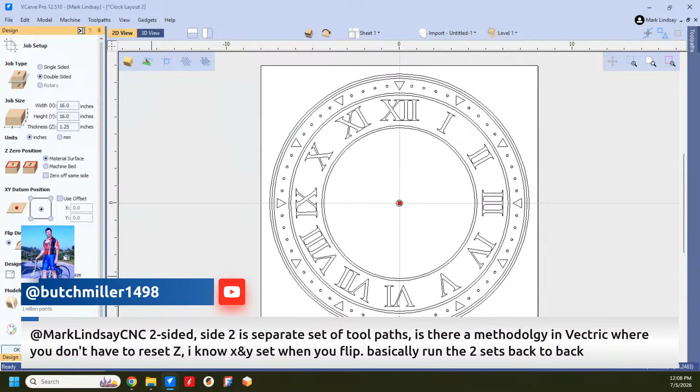From here, we have a couple of things we have to consider. One is how to index this thing after we've flipped it. The other is, when are we going to do our cutout? And how do we make sure we get everything correct? Well, for the indexing, for the positioning, there are many ways of going about it.

Some folks will go to great length to make sure that their material is perfectly square, and they'll use a fixture, even something as simple as a fence, a right angle fence, kind of like a square. And they'll put the bottom left corner up against that. That way they know they can index it. If they do it that way, they have to make sure, A, that your top and bottom vectors are perfectly in the center of that material. Then they have to make sure that this piece is perfectly square.

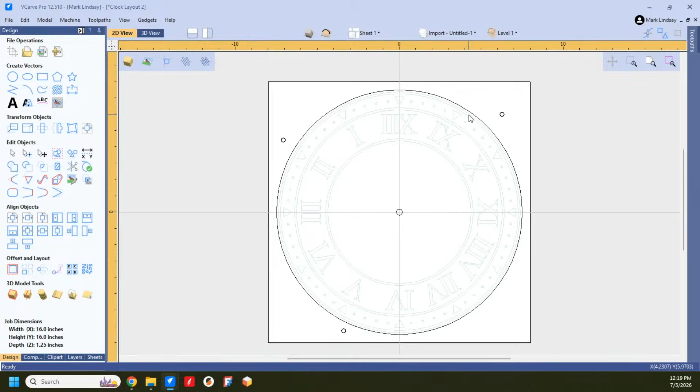So back over to the top. Now I've got my design finished. This is what I'm going to do, with the exception of the back. So my front face is finished. Everything is cool. Now I'm going to go over and I'm going to toolpath it. So there was already a toolpath made for this because it was a single-sided job when I first got into this. Well, now it's a two-sided job. So I've got to change it a little bit.

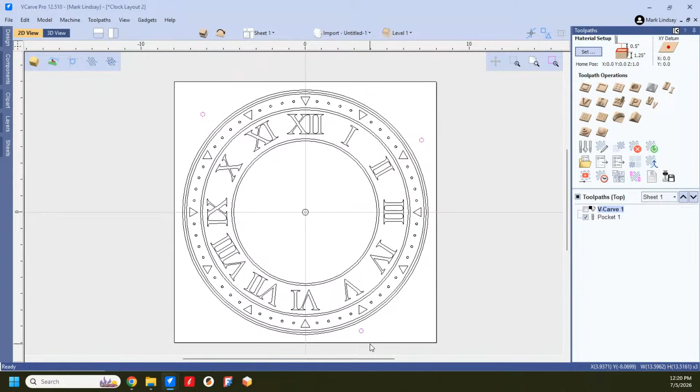The first thing I need to do is I need to select my index holes, and I'm going to use a drilling toolpath. Now I'm using a 1/4 inch bit, and I'm going to drill straight down. So it's got to be an upcut bit. I don't care if I get chip out here, because that's going to go away. So I'll use the drilling toolpath with an upcut 1/4 inch end mill. Now I'm going to make my cut depth for drilling. I'm going to make it 5/8 of an inch deep, 625.

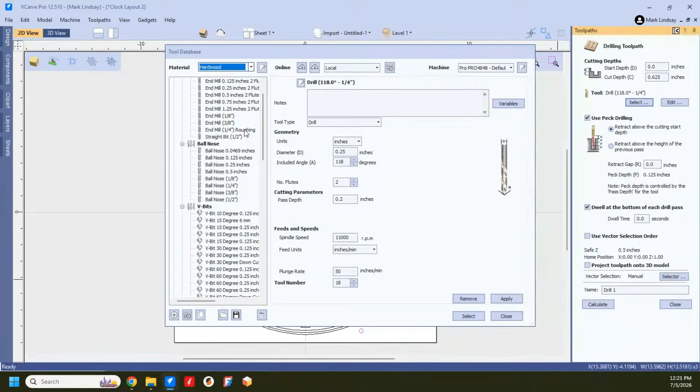Okay. And I don't have a solid carbide 1/4 inch drill. I'm going to use a 1/4 inch upcut end mill. I'll apply that. Select it. And I'm not going to use peck drilling. It can go 5/8 of an inch without peck drilling. I do not want to dwell at the bottom of the drill pass.

And we'll call that drill 1. That's fine. No, it's not. I need to differentiate this. This is dowel holes in material. And we'll calculate. All right. I don't know if I need to preview this. It's a dowel hole. Uncheck the pocket. I don't need that. But that needs to be the first thing I do. So now I'm going to bump that up to the top of the list, just by using this. Select it and then use these arrows over here.

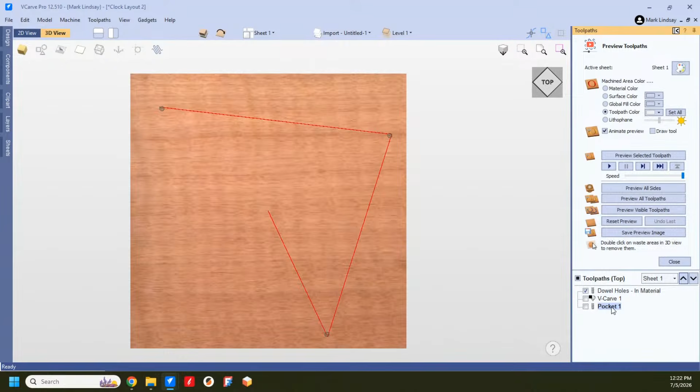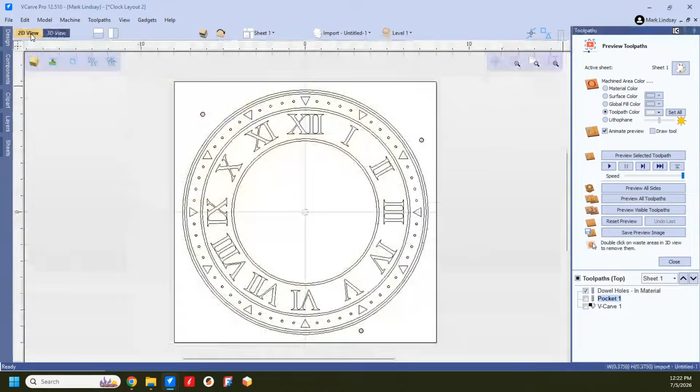Then I can come along, and because I'm using the same bit, I can do the pocket, which is for the shaft hole. And let's see, V-carve, that's going to be just fine. Now I'm going to go back to the 2D view. I'm going to select this one. I'm going to close my preview. And I'm going to do a profile toolpath.

And my cut depth, I'm going to cut 1/4 inch, 0.25. I'm going to use a downcut 1/4 inch end mill, 0.25 inch. Select. And I'm going to cut to the outside of that vector. I don't need to do a separate last pass. Yeah, I probably should. I'm going to go ahead and do a separate last pass with an allowance of 0.01.

What a separate last pass does is, I'm doing 2 passes. The first pass will cut 0.01 outside of that vector. Then the next pass is going to cut right on the vector. What this will do is it'll eliminate those plunge dwell marks along the edge, especially when I add ramps. And we're going to do a distance of 1 inch.

And we're going to do a smooth ramp, a distance of 1 inch, meaning it's going to slowly ramp in and cut 0.01 away to the outside of this vector. Then on the second pass around, it's going to ramp down and cut right on the vector. That eliminates the little witness marks, the little layer lines you get from each pass, because that's going to cut full depth in one pass. Okay, but it's only taking 0.01 of material off.

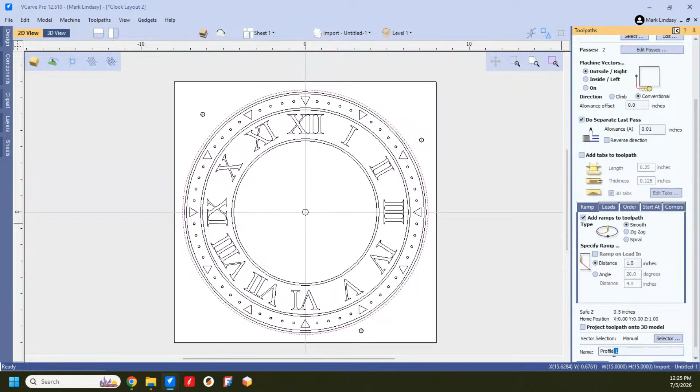Okay, and we'll call that just profile, is good. We'll calculate. And now I'm going to go ahead and preview all of the toolpaths on the top side. The index holes, the V-carving, the pocket, and then that little bit of a cutout right there. Not a complete cutout all the way through the material. Okay, so I'm going to leave that like that. I think we're looking good so far.

Now we'll close it. I'm going to come back over to the Design tab, jump into the 2D view. Now we're going to go to the bottom. I can tell you with certainty that when you go to make a clock, the best decision you can make about the design is you wait until you have that clock movement in your hands before you design the recess for the movement. Because you don't really know how deep you're going to have to make that pocket for the movement until you have that clock movement in hand.

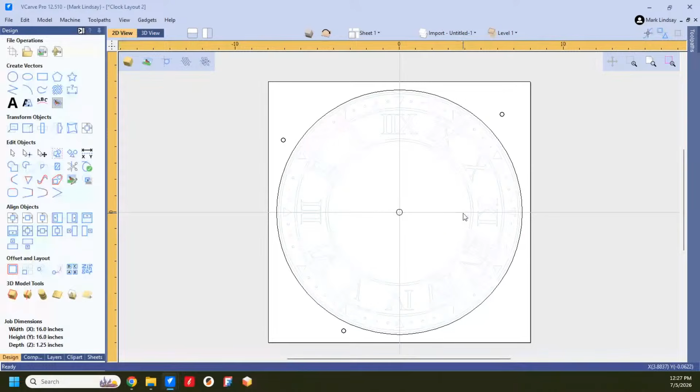But I find that when I'm either selling or giving a gift that has my name on it, I don't want it to be a piece of junk. So I'm willing to invest a little bit more money in a quality movement that isn't going to suddenly start making the minute hand spin like a fan or something like that, or just simply stop working.

Clock movements come in all kinds of shapes and descriptions, but Seiko is a good quality name, so I'm going to go with the quality Seiko movement. That's just my 2 cents. It has my name on it. I want it to reflect quality. I don't want to give somebody or sell somebody a piece of junk.

So, the movement I have, let's go ahead and figure this out. The movement I have is 3 inches tall and 3.5 inches wide. So I'm going to come up here to my draw rectangle. And I want this to be drawn on my 0 point, my X0, Y0, because again, I've got my XY datum position at the center.

Now, I prefer to radius the corners. I'm not going to get an exact radius off of this clock movement, but I can get close. I'm just going to radius those corners to 0.25, and that'll give me a decent radius on the corners of this rectangle without it being overdone. The movement will fit, so I'm not really concerned about it.

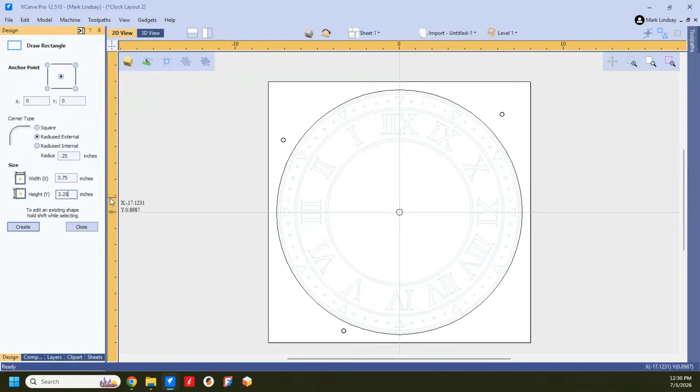So for its width, I'm going to go with 3.75. And the height is 3 inches. I'm going to do the same thing. I'm going to go with 3.25. So it's a little bit bigger than the movement. That gives me some leeway. And I want it on my XY0, create, and there it is. So that's where my clock movement is going to go.

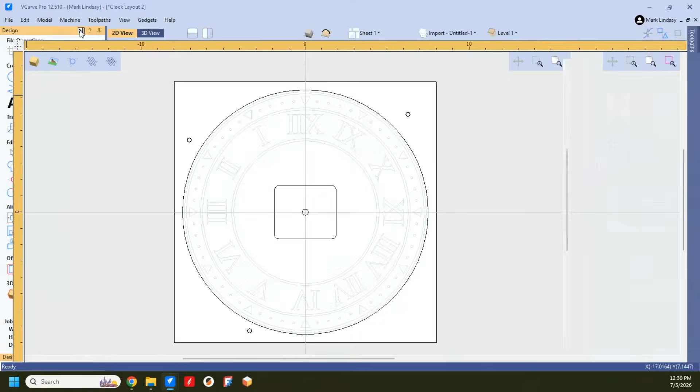Now I got to figure out the depth, because this is going to be the second thing cut on this side. We'll go over here and we're going to start tool pathing. I don't have any tool paths for the bottom yet. So the first thing I'm going to do is drill these index holes, because without these index holes, the whole project could be just shot. And I'm going to do a drilling tool path again. And it remembers everything that I put in when I worked on the other side.

I'm using a cut depth of 5/8 of an inch. And here's why. I use 1 inch long pieces of hardwood dowel. Now, a lot of folks will say, wait a minute, why don't you use a precision ground steel dowel? Number one, I don't want to run into it with a bit. But these hardwood dowels are very rarely a 1/4 inch diameter. Yes, they're anywhere from 0.23 to 0.24. Well, that's a lot of slop. With one, yes. With three, no.

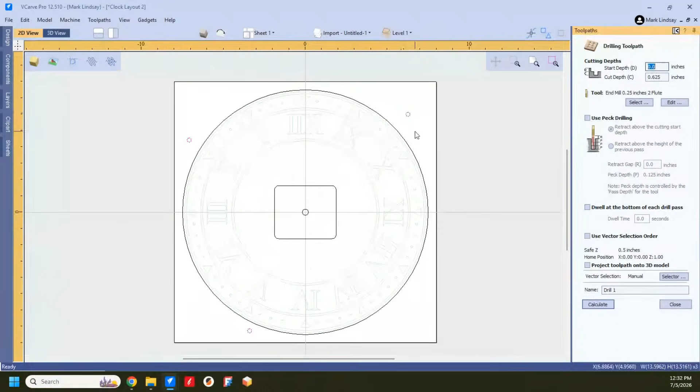I've never, not once, had a two-sided project fail because of using the hardwood dowels. Not once. One dowel, yes, you're introducing some wiggle room there. Two dowels, it's less. With three dowels, it's almost non-existent. In fact, it pretty much is non-existent. Again, I've never had one fail. I've never had one come out misaligned.

So I use the cheap wooden dowel that I can get for 50 cents down at Lowe's or Home Depot and get a bunch of 1 inch long dowels. So I'm using 1 inch long dowels and I'm drilling 5/8 inch on each side. That gives me a little bit of wiggle room there as well. It's not going to stand up too tall, and it's not going to disappear down into the hole.

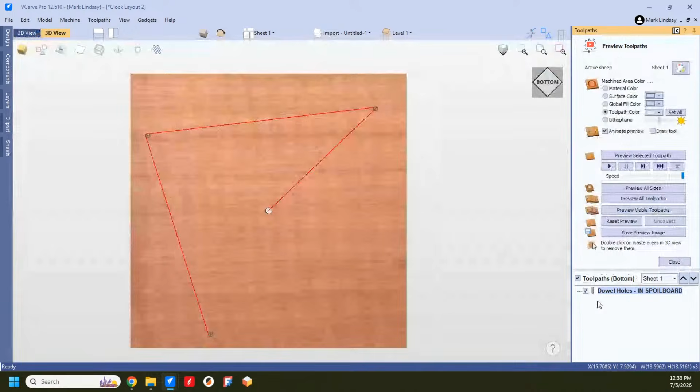Again, I'm not going to change anything except the title. And this is dowel holes in spoil board. I need that because I will not remember, because I may calculate this and then not cut it for another 2 months while I'm finding the right material to cut it out of. So we'll calculate that. That's our first tool path for the bottom side.

All right, now next, let's go into 2D view. I'm going to cut this pocket. Now, this particular movement is just slightly under 3/4 of an inch thick. And the shaft for the hands that's got to go through this hole is 3/4 of an inch long. So I've got 3/4 and 3/4, that's 1.5 inches. My material is only 1.25 inches deep. So I can't bury this movement in the back of my material.

Well, how the heck am I going to hang it? Well, that's simple. The Seiko movement I have has a hanger built into the back. It has a keyhole in the back of the movement itself. Some of them have a little tab, and that's going to determine how deep you can bury it in. If the tab sticks up over the movement itself, that's also going to dictate how deep you can put that movement. So with all that said, for the depth of this movement, I need to think about that shaft length.

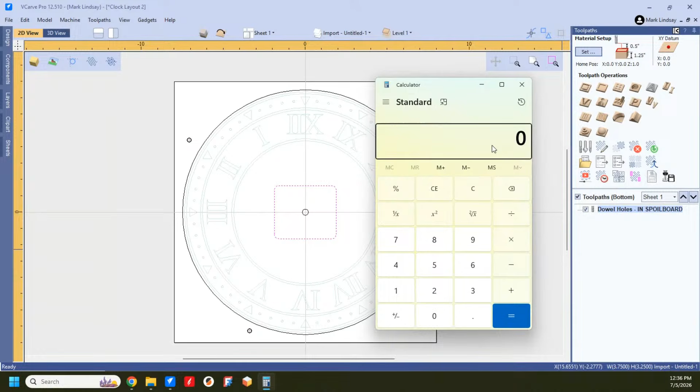they said there'd be no math. Well, let me bring up the calculator here, and I'll do it for you. Right here live, admitting I should have never written in that book that math sucks.

1.25 minus 0.5 equals 3/4 of an inch. So that's how deep I'm going to make this pocket. 3/4 of an inch. So I'm going to cut this pocket 0.75, and I'm going to use a 1/4 inch end mill. It's going to make 6 passes. That's fine. I'm going to use an offset, mainly because nobody is ever going to see this. I don't care if it leaves circular marks down on the bottom of this pocket. I'm going to ramp in the plunge moves over a distance of an inch, which is fine for that 1/4 inch bit. And I'm just going to call this pocket, and we'll calculate.

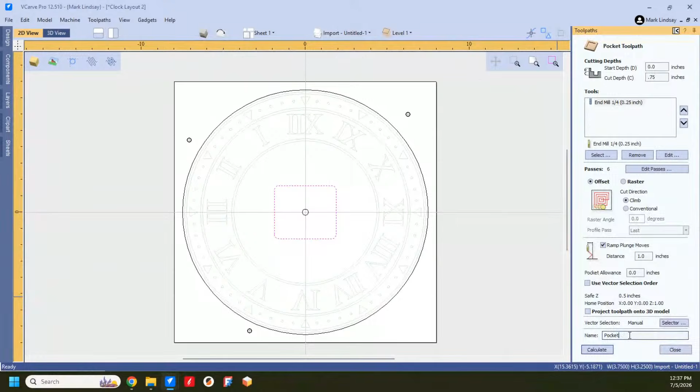Okay, we've got those two. Now, turn on my vectors. Now is when I need to do my profile cutout. Oh, I'm in the preview. Close. There we go. Now it'll let me select the vector. And again, using a down cut end mill, I'm going to go the whole depth. So we're going to go 1.25. Going to take 10 passes. That's fine. I am going to do a separate last pass at 0.01. Oops. Come on, Mark.

0.01. Not going to add any tabs to the tool path, but let's say I wanted to add them. Now, got to remember, I've already cut a 1/4 inch into the front. So if I add tabs now and they're less than a 1/4 of an inch tall, I've got some problems. So a 1/4 inch long is fine. I'm going to make them a 1/2 inch thick. 0.5. And the reason for that is if I machine away a 1/4 of an inch here, when it comes to these tabs, I'll still have a 1/4 inch of tab left. Okay.

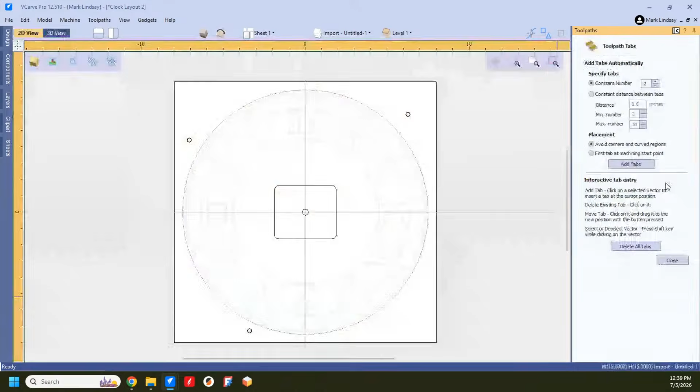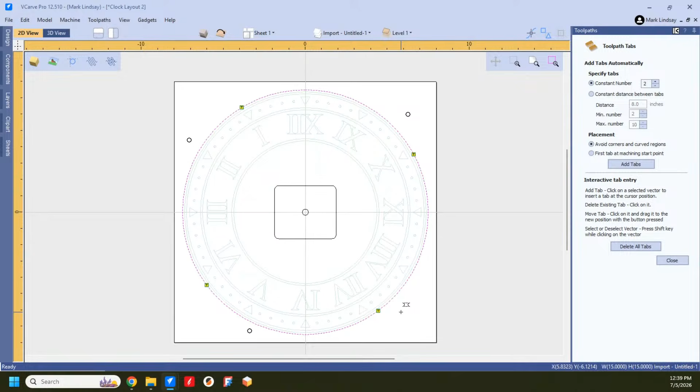Where should we put one? I'll put one right here. And I'll put one over here. Another here and another up here. They're kind of asymmetrical, but I'm worried more about how I'm going to mount this material. If I've got screw holes out here, I don't want the tabs interfering with them. Okay. So I can close that, and now I can calculate the tool path.

And I'll preview all the tool paths on this side. There's my index holes, which will actually be cut in the spoil board. There's the pocket for my movement. Yep, the tabs got cut through. I got to make those tabs thicker.

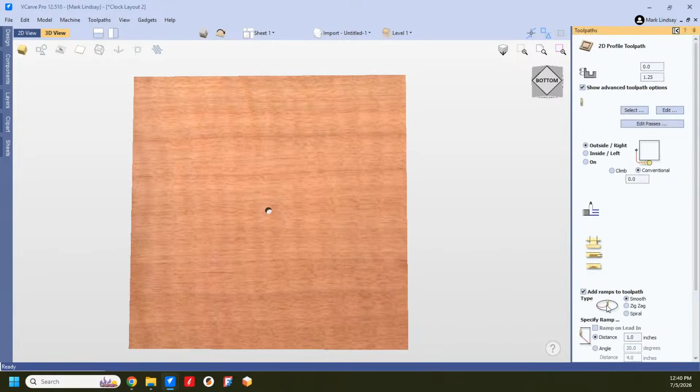Okay. So we're going to undo last. And I'm going to take that cutout, and I'm going to make the thickness of those tabs, we'll go for 3/4 of an inch. All right. Now we'll calculate it. Now we'll preview. Okay, now I see the tabs. There we go. Now we'll preview all toolpaths. In fact, I'm going to preview all sides. There we go.

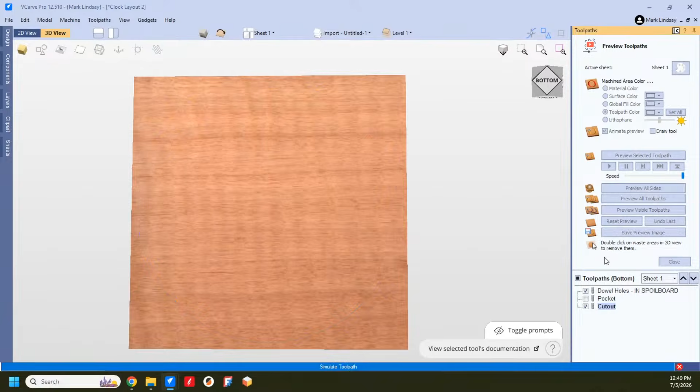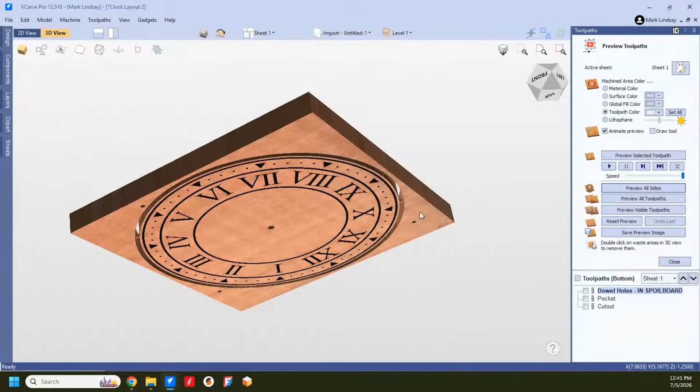Starting with bottom. And there is my tabs. That's already done, so that's not a big deal. Tabs are still not good enough. Oh, they're 3D tabs. There's your problem. How thick did I go here? Oh, we went 1/4 of an inch deep. Oh, I'm -1 inch. How did that end up being 1 inch? No, I'm at -1. Okay.

Yeah, all right. We're going to undo last again. Oops. Didn't mean to do that. There we go. I'm going to undo last. Okay, wait a minute. We'll reset preview. Cut out. Looks like I'm making them 1 inch thick. Oh, I'll leave it alone. Turn off 3D tabs. There we go. Come on, Mark. There's a little bit of back and forth in all of this. Now we'll preview all sides. And it's going to do the back first, of course.

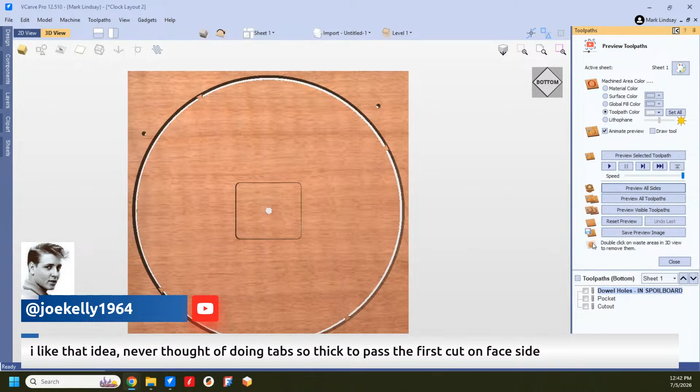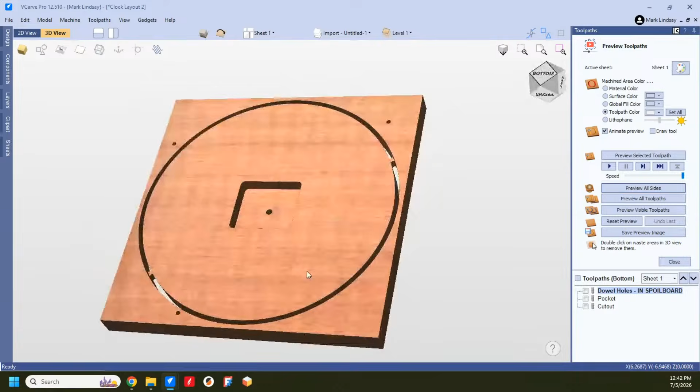Joe Kelly says, I like that idea. Never thought of doing tabs so thick to pass the first cut on the face side. Yeah. And nice feature would be if you could set tab location in the middle of the material on a two-sided project. Yeah, if you're gonna use that method of cutting a little bit of a profile on both sides. But now you can see with the standard tabs, they held. They're not 3D tabs. I can get into the advantage of 3D tabs versus standard tabs another day. There we go.

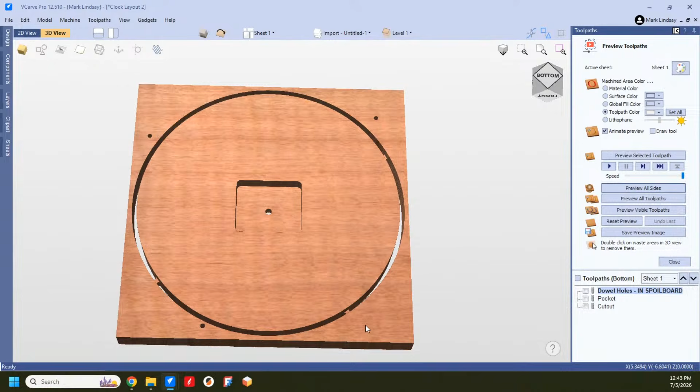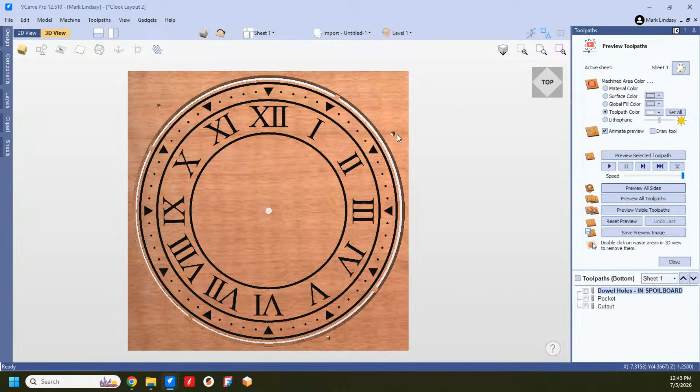So I've got my pocket cut out. I've got my profile cut out. And both sides looking good, ready to go. The crucial part, and this is the part that people find hardest to wrap their heads around, is these indexing holes. While it looks like they should not line up because we're on opposite sides here, they will line up. They do line up. Make them asymmetrical so they'll only line up and index one way.

There are a couple of things to pay attention to when you do a two-sided project, especially if you've never done one before. I would encourage you to get some scrap wood and just practice. Come up with something. Cut a rectangle out and then cut a pocket out of the back. Or vice versa. Cut a pocket in the front, flip it over, and cut the thing out.

For scrap wood, I found my best source is I get on Craigslist and go to the free section. Yes, I'm one of like 11 people that still uses Craigslist and not Facebook Marketplace. This is especially true late Sunday and on Mondays. You would be amazed at the wood that people are getting rid of. Garage sale leftovers, or somebody had a section of fence blow down, extra construction materials. It doesn't matter.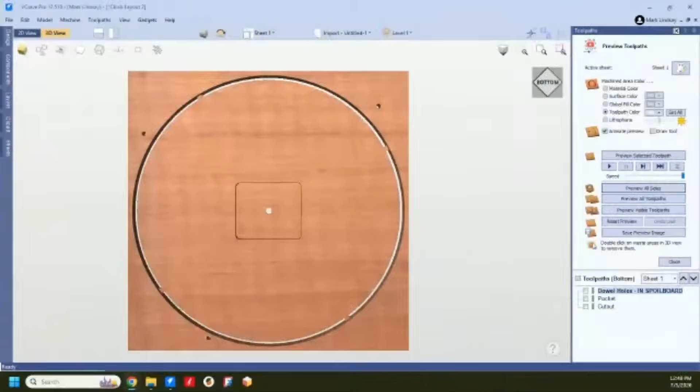Let's go back into the software here. I've got a new session open here. Anybody can get into their clip art and make themselves a dish. We've got a little bowl shape here. Whoops, I messed that up. I forgot to hold down shift, but that's all right. Center it back in the center of my material. Select it. I'll go into the component tree. I'm going to change combine mode to subtract. That way, when I look in the 3D view, I've got a dish.

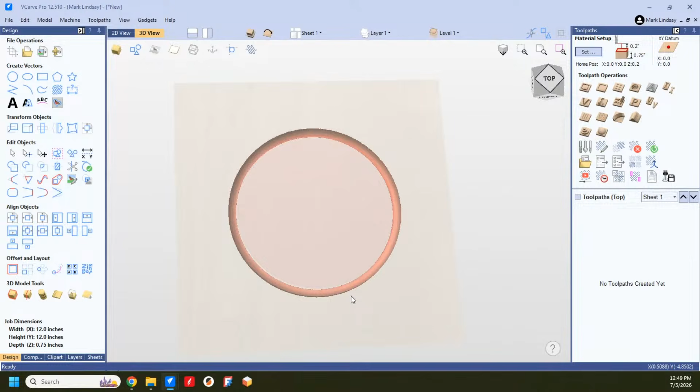All right. I'm going to put a zero plane over the top of that to fill in the jagged edges of that dish. And that's going to, what in the world? It's cutting through the material. Oh, well, 0.75, 12 by 12. Okay, that's fine. And this is a double-sided job. Click OK. And I'm going to go back over to my component tree and look at my flat round circle. I'm going to go to the properties. And I see it's 0.3449 shape height. I'm going to go a little bit further than that. I'm just going to go 0.5. Let's play it safe for this demonstration. All right. We'll close that.

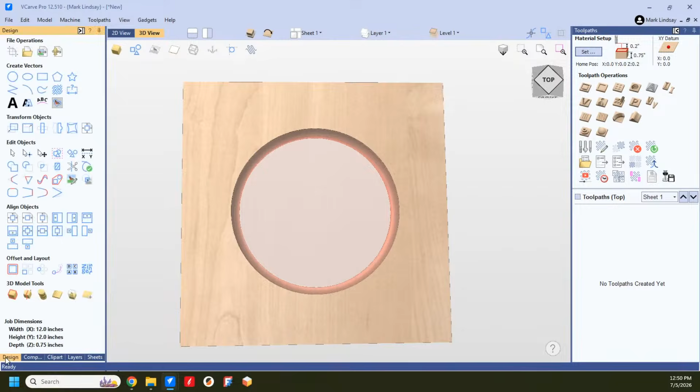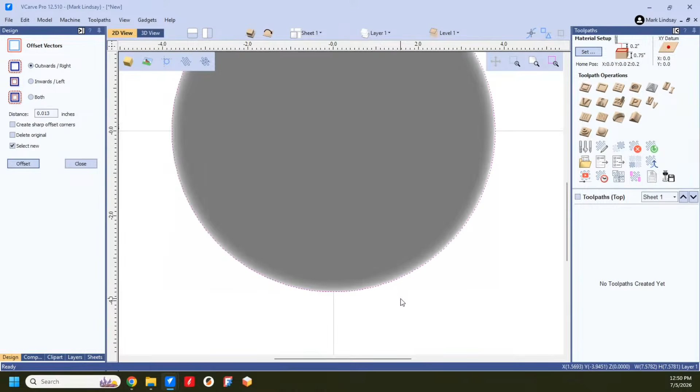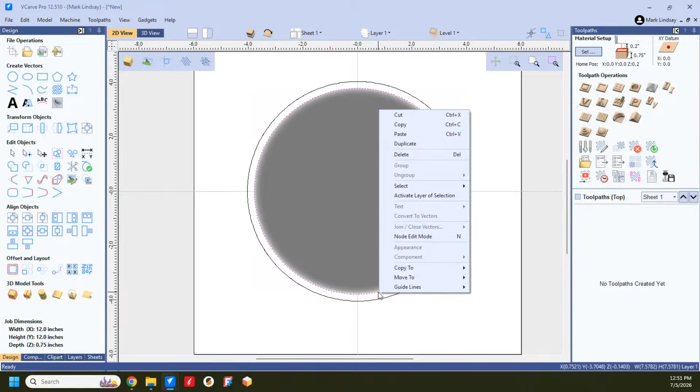And we'll go back into the design tab, back into the 2D view. Got my component selected. I'm going to draw a vector around that component. Then I want to offset it. How thick do I want the rim? No, come on. Let me select the vector. There we go. How thick do I want the rim to be? Let's go for a thick rim. No, not so thick. Let's go with a 1/4 inch diameter rim. And I'm going to offset it, and I'm going to select the new one. Now, I'm going to copy this to the other side. This is my profile cutout, remember.

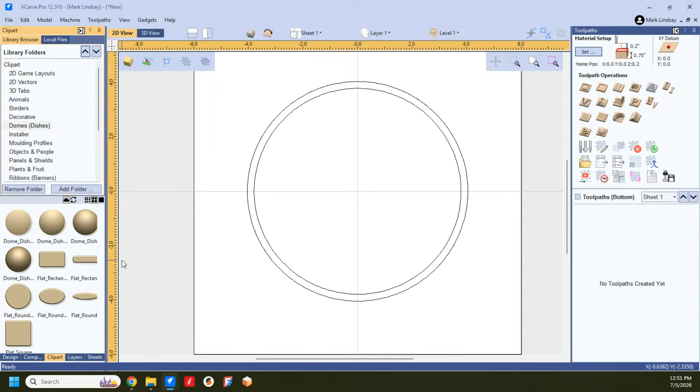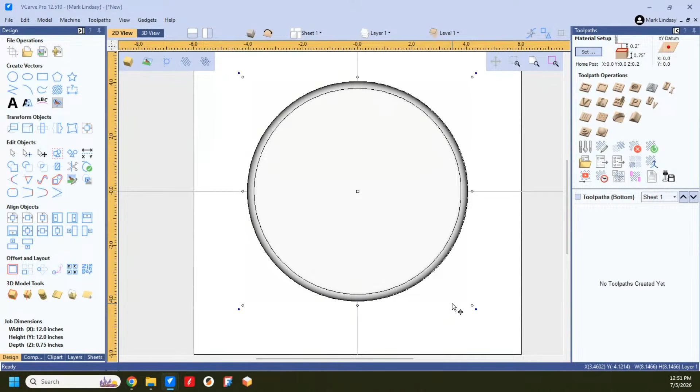Now, I'm going to flip to the other side and go back into clip art. And I'm going to set the same round dish. And we'll hold down Shift, bring it out to where it's the same size as the outside, roughly. Select it and make sure it is centered. All right. Check my 3D view. What have I got going on? Let me look at my component. We got it set to merge.

Let's look for properties. I want my shape height to be, that one's a 1/2 inch. My material's 3/4 inch thick. I want a 1/4 inch thick bottom. Ooh, that's not going to work. Let's go with 625. This is going to be the top, so I want this to be 0.25. Oops, too many decimals. Let's see what we get now. Am I going to have to go thinner? I'm going to have to go thinner than that. That means I'm going to have to make,

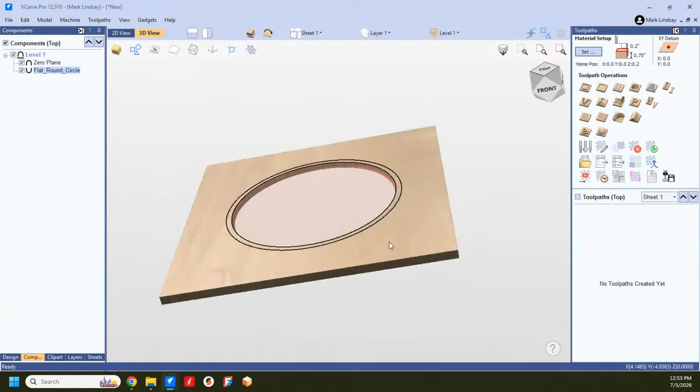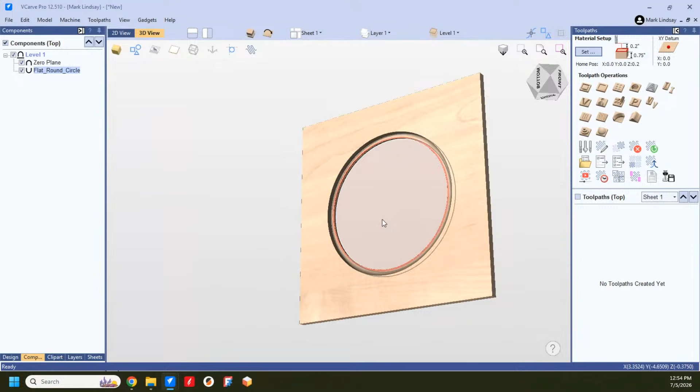all right, let's go back over to the top side. And we're going to take that. Let's go with 375. Still didn't fill it in. It's still cutting all the way through. I don't get that. We're looking at the bottom. No, we're not looking at the bottom. We're looking at the top. There we go. All right, flip it. Now we're looking at the bottom. There we are. Properties.

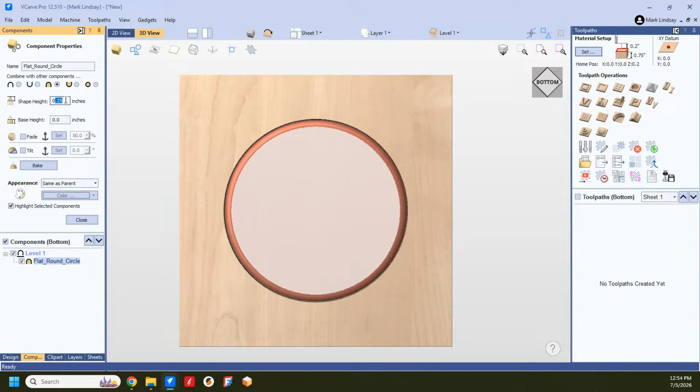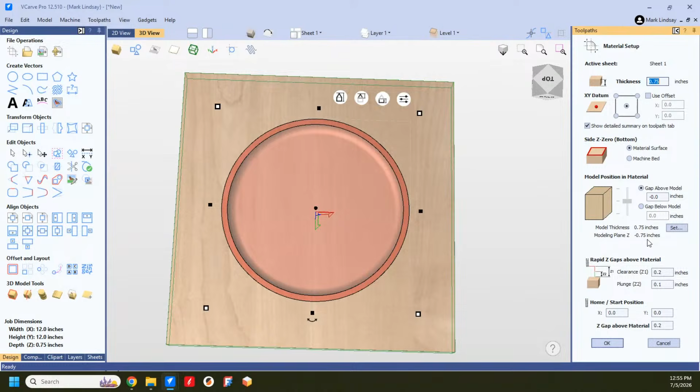I'm playing now. That's why it's silent. And there we go. I was going too shallow, not deep enough. So that's going to be the same thickness. There we are. Now that I finally got it figured out, let me go in here to material setup. Thickness is 3/4 inch, Z zero to the bottom. And we're good. We got a model thickness 0.75, and the model plane Z. Okay, great. So we're all right there.

Now, my point in all of this, as I was trying to say earlier, anybody can come up with a bowl and then do a profile cutout that has the outside straight up and down sides.

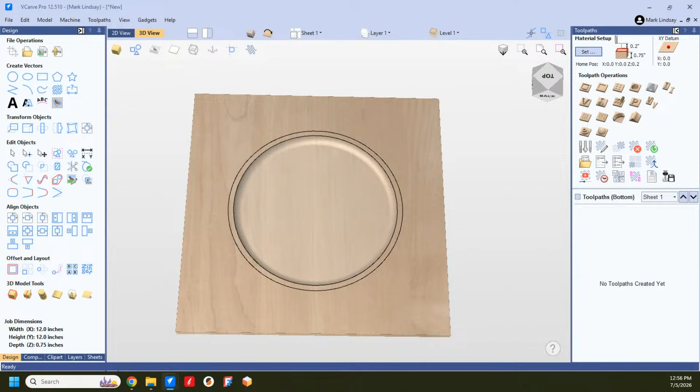Okay? No. I dish on top and dome on the bottom is what I'm doing. Okay? I need to flip it back, so we're looking at the top first. And I'm going to go about this all wrong. There's no index pins, nothing, no indexing dowels.

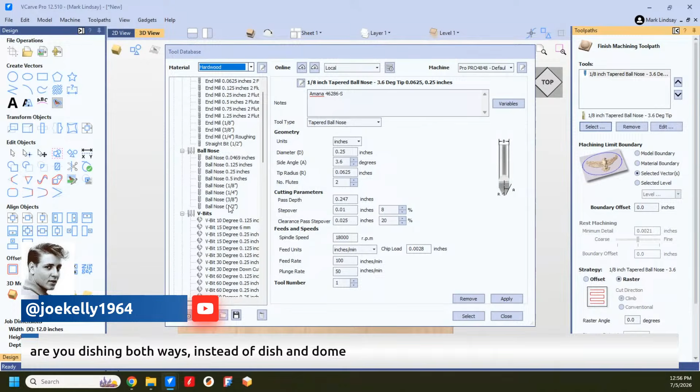And I'm going to go ahead and do a finishing tool path. I don't need an 1/8 inch tapered ball nose for that. I'm going to get aggressive. I'm going to use my 1/2 inch ball nose. There we go. Select. I'm going to use this selected vector here. And I'm hesitant to do offset. I'll go ahead and do raster. Raster angle of 45 degrees. And we'll just calculate that finishing tool path.

I have a couple of questions hiding in reserve, and I will get to them. I have not forgotten about you, Stubbs Mom.

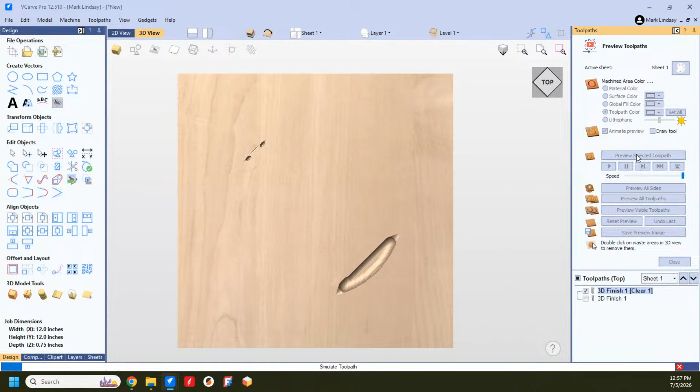And we'll preview that tool path. Oh, I didn't do the clear pass. Hello. Preview that tool path. That's a little bit better. Sheesh. Now, I'm not going to talk about step over. I'm not going to talk about cleaning up. I'm not going to talk about using a bowl bit or anything like that. We're just doing a quick and dirty reveal here to show what a two-sided project can look like and how you can make yours stand out

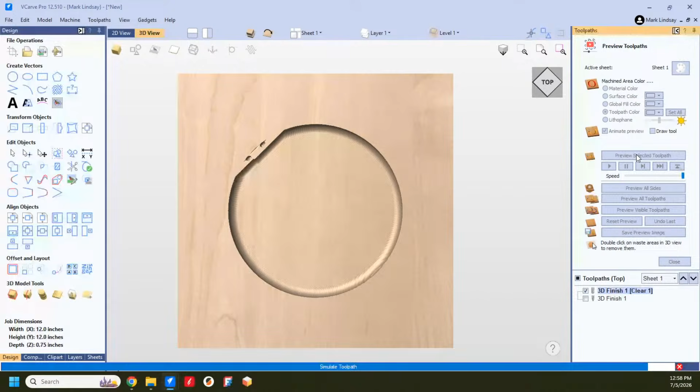from the crowd. Again, anybody, anytime can carve a dish in one side of a piece of wood and say that's good enough. Now, there are times where you may want to leave the material alone and decide that's good enough. If you've got a nice slab that's, like this one, 12 by 12, roughly, then yes, it's perfectly okay to leave the sides as they are. But if you're going to be cutting this out, even just to use as a candy dish, you'll want to make it a little bit more special.

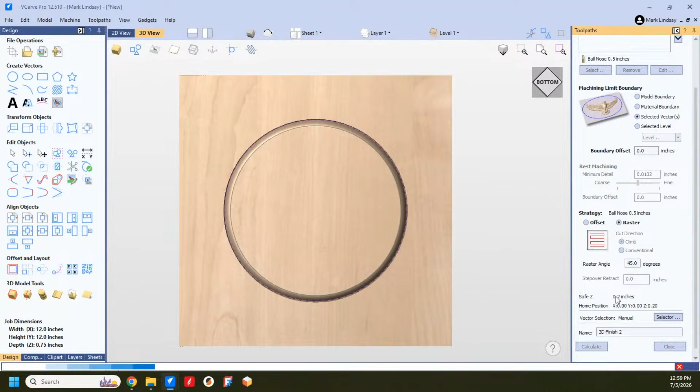Well, now we're going to flip it over, and we're going to turn on the vector so I can see, close, and we're going to select this vector as our boundary. Not going to worry about a 1/8 inch tapered ball nose, so I'm going to remove that, and I'm just going to machine this whole thing, hog it all out with a 1/2 inch bit. And I'm going to use a raster and calculate. And okay, there's only one toolpath. We'll preview it.

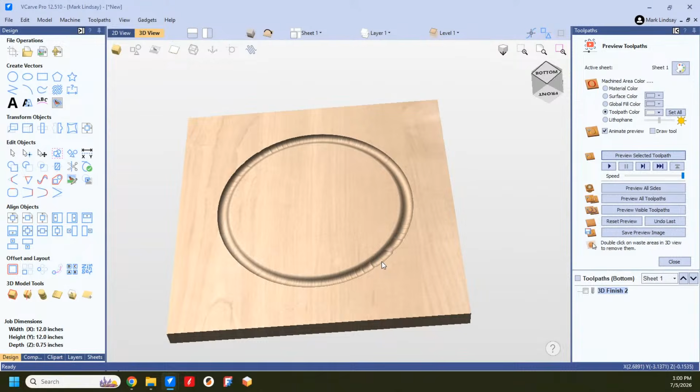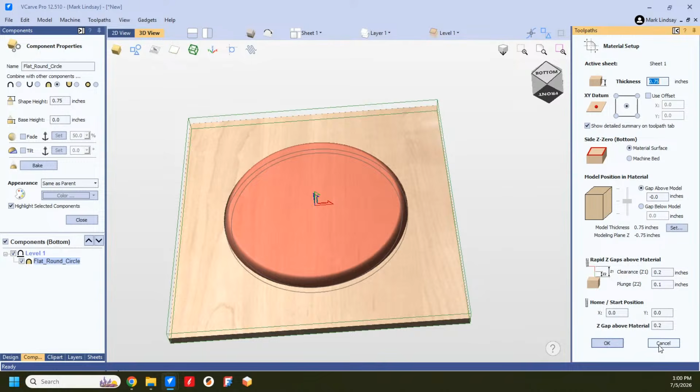There we are with the bottom. But, well, that didn't go nearly deep enough. That needs to go further, because that needs to go all the way through. What is my depth down here? It's not very deep. Undo last. Let's get back over here into the component tree and the properties. 3/4 inch. Why didn't it cut all the way through? Well, let's close this. Take a look at material setup. And we're fine. Why didn't it go all the way through? Ah, look at where it's placed.

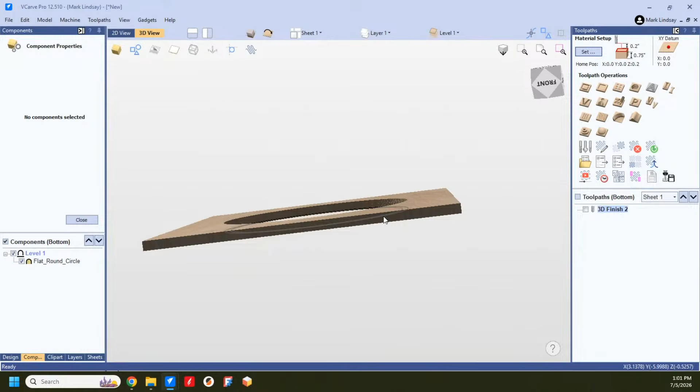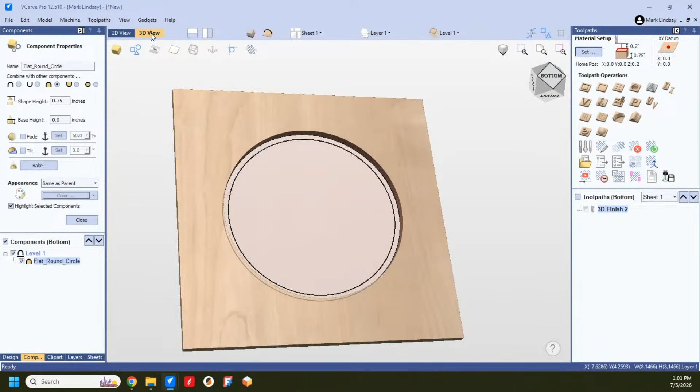I'm just playing again. Nope, that's going to jump through. Okay. Hello? Where'd you go? Okay. 0.75. Am I looking at the bottom? I'm looking at the bottom. It disappeared on me again. I've got it set to merge. Maybe set it to add. No, that don't help. Set it to merge. Why did it go away?

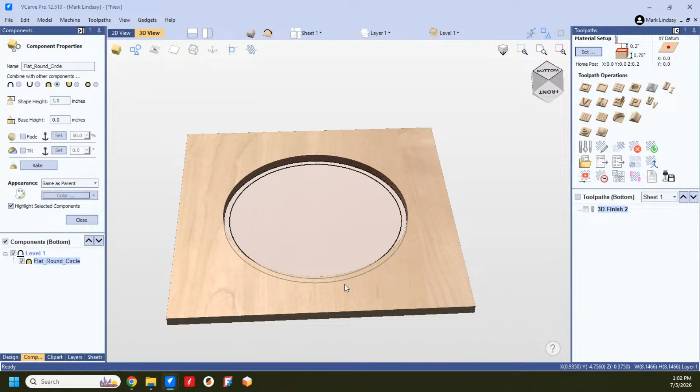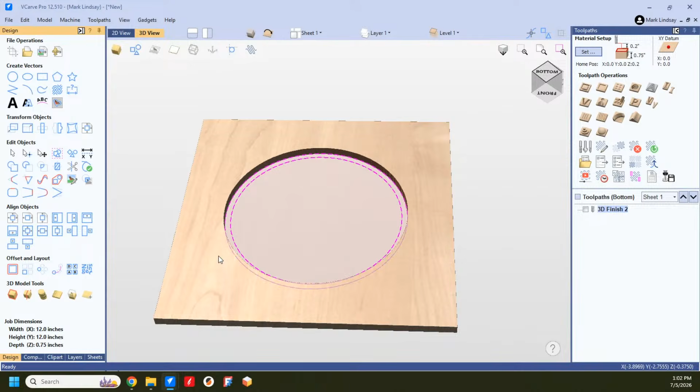Try 1 inch. That should have cut all the way through. Hello, where are you? Well, anyway. I'm trying anything and everything to get it back. This ain't working. Huh. Don't know where it went to. Let's go into here. And we're going to reset the preview. See if I've got something in there going. Nope. It just wants to cut the whole thing out. Well, that ain't right.

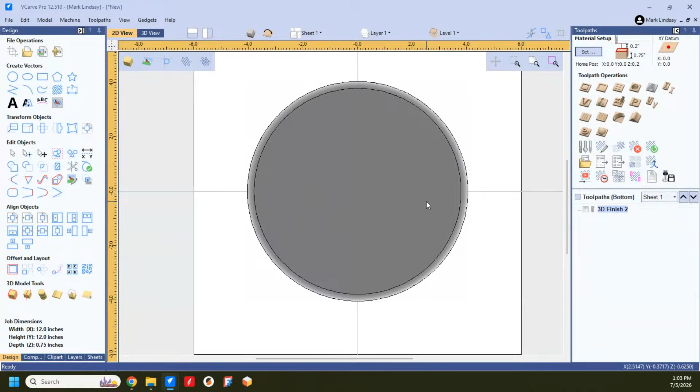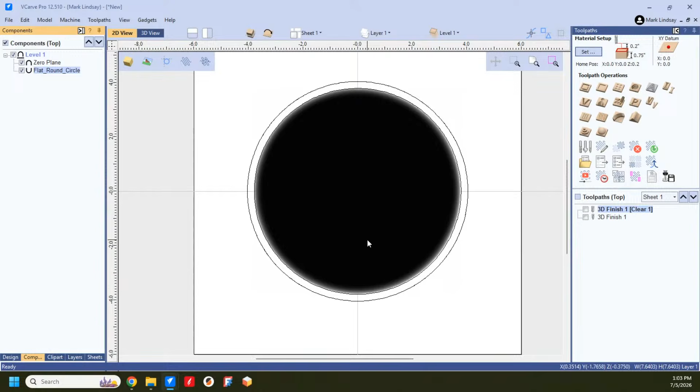There it is on the 2D view. Under the component tree, we've got it set for merge positive. Let's go into the other side, flip. And wait a minute here. That's set for subtract. How did that go to subtract? Component, merge. That should not be subtract. Let me change that to merge. Now I got it back. Somehow I got it back when I set it to subtract. That ain't right.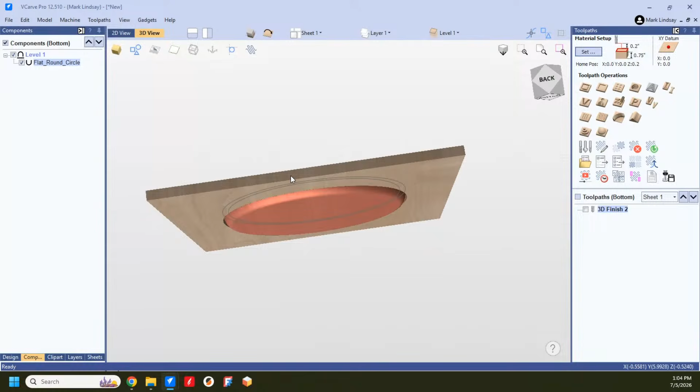What an oddball. Okay, let's get into the properties again and see why it's not cutting all the way through. Let's try a little bit deeper carve. Go with a deeper shape height, 1.0. But it's going to be thicker than the material now. That ain't going to make it cut any thicker. Let's go 0.75. And let's give it a base height of negative 0.75.

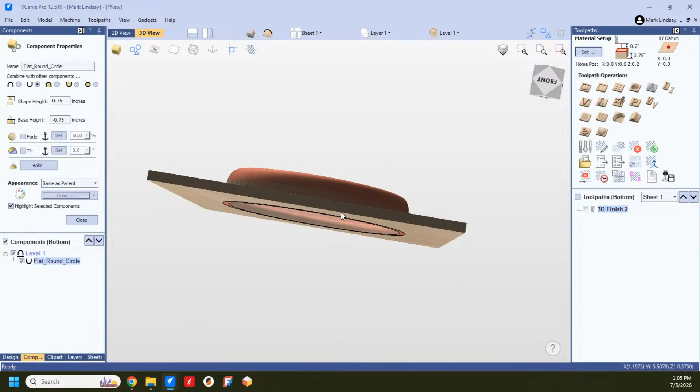Nope. Go with the base height of 0.75. Positive. Nope. Base height of 0.5. Nope. Let's get rid of the base height altogether.

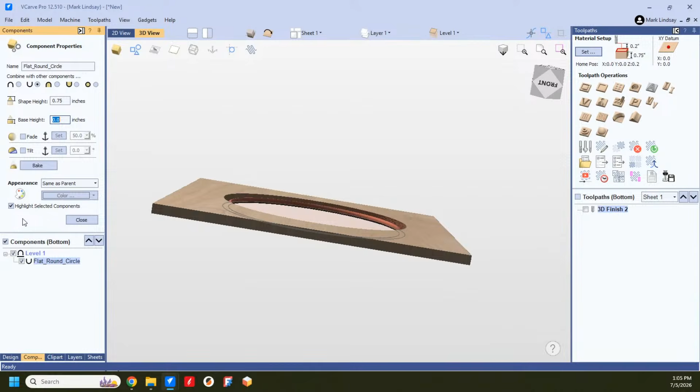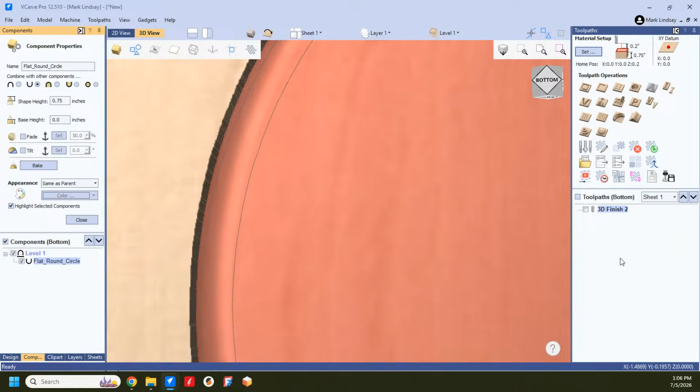Okay, I've got that back, but now I need to move that further down in the model. Let's take a look down here. How deep are we? We're at negative 0.5. Oops. What's the max depth that cuts? 0.1815. That ain't right. Now that I've played around with it so much.

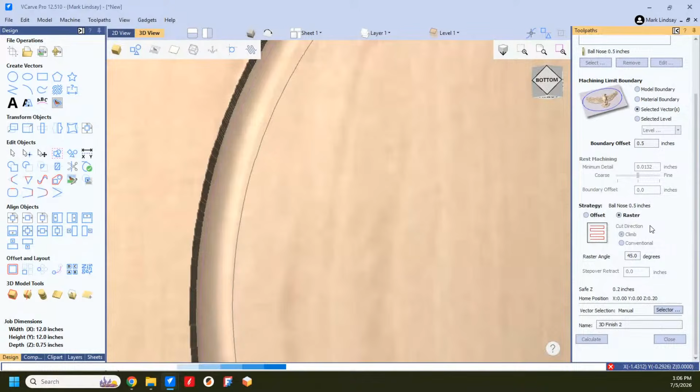Let's recalculate the tool path and see what I get here. Boundary offset 0.5, same as the diameter of the bit. Let's calculate. Let's back out, preview all sides, see what we get here, because that should cut all the way through. But it's not.

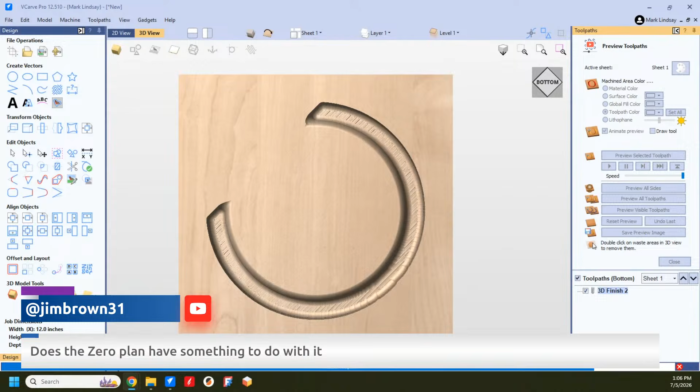Jim Brown's asking, does the zero plane have something to do with it? It may very well, but it shouldn't, because it's got a thickness of 0. Okay, now we're carving the other side. It's got a thickness of 0 and it sits on the top surface. And we'll see what we have here when we're done.

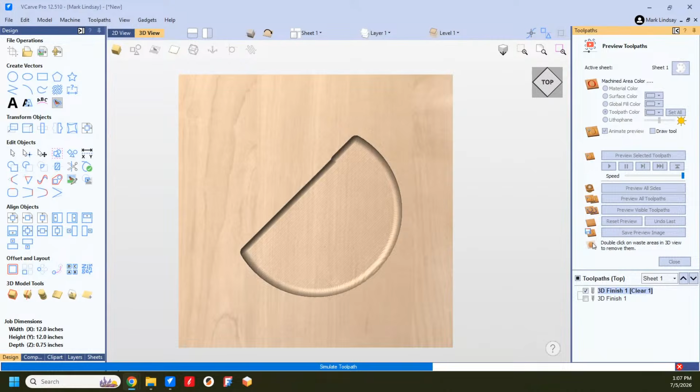And again, I haven't forgotten you, Stebbs' mom. I've not forgotten you at all. You have a very good question, and I will get to you. The other one that I have, that may take a while, from John Pellerin. I may or may not have time for it this session. We'll see. Come on. You can move faster than that. I know you can.

All these marks in here are due to the step over on my 1/2-inch bit. If I was doing this for real, I would use a bowl and tray bit, and that would take care of all those marks. But hey. And then it'll go around and do its profile pass to do the final cleanup. Unless I have that turned off, I don't remember.

And there we go. And nope, it's not cutting. Well, yes, it is kind of sort of cutting through. Now is when you would do a, there we go. That's what I was after. Now let's flip it over. Yes, it is cutting through more or less. Okay, turn on the vectors. And we'll flip it over. Turn on the vectors. Come on, straight down.

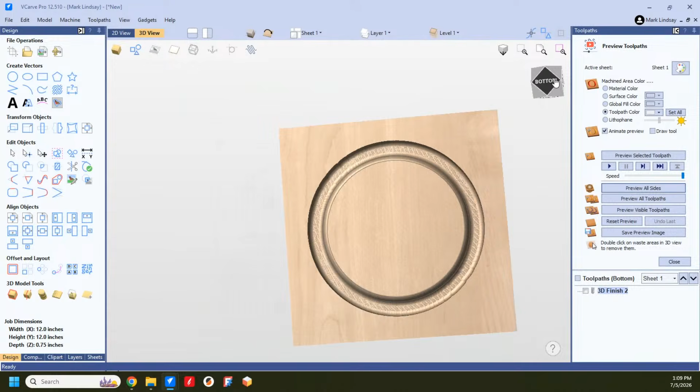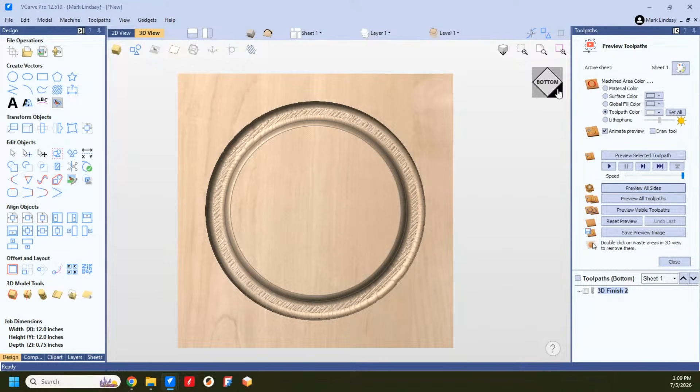And this is when I would... I don't know. I would probably offset this vector outward, or maybe even cut the bottom first. Add some 3D tabs to keep it from breaking loose. And I would offset this vector out and make that my profile cut.

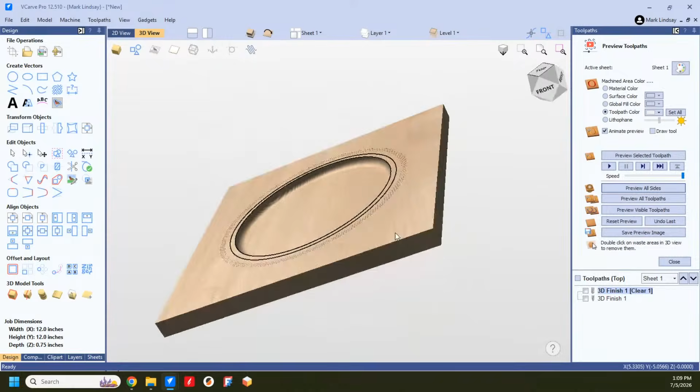But anyhow, having this carved in and then using this as a profile cutout, that's one thing. But when you can shape the bottom as well, that sets your work apart from other people and other projects. And there are various ways of shaping this bottom.

Oh, okay. John says he figured out his issue. Okay, terrific. Thank you anyway. All right. Okay. So I won't address it.

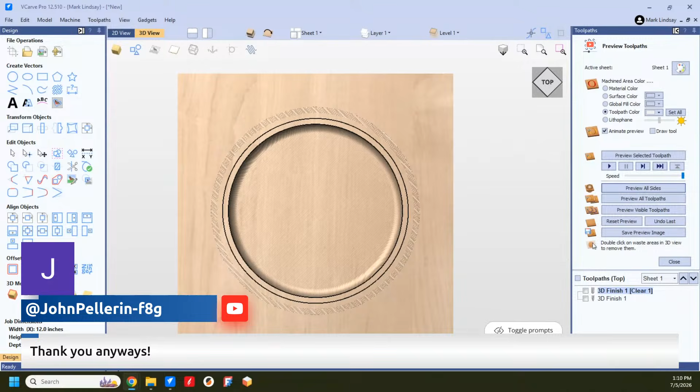Okay. So my whole point in this is two-sided projects, once you get them figured out and you're not having problems with 3D models, once you get that light bulb moment and it makes sense to you, they become very addictive.

I'm thinking the step over and the ball nose bit are not cutting through on material apart from the tip of the ball nose. That's exactly it, Joe. That's exactly it. And that's okay because it's leaving such a fine little piece in there that it is cutting through. It just is not quite, because it is a ball nose. And that leaves you with a little bit to sand off, but it's not a problem.

I've done several. I don't think I have any pictures on this computer. Maybe I do. Let me look here. I don't remember, I don't think I have pictures. Yes, I do. I have one picture. Okay.

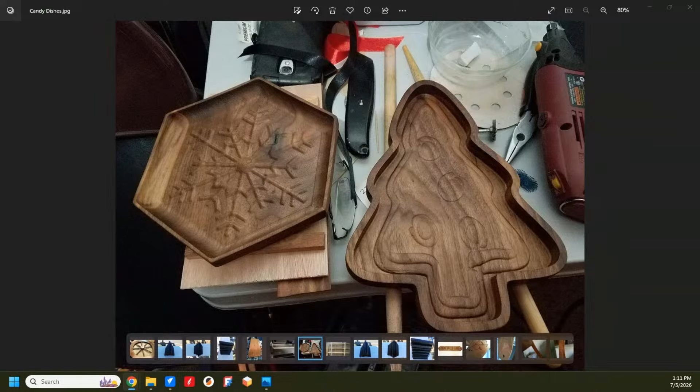These are a couple of my first two-sided projects, and these were little candy dishes that I ended up giving to my daughters. We were going to my oldest daughter's house for Christmas, and thought, well, we're bringing fudge, and what's the best way to serve fudge? In a nice little candy dish. So I machined these two out of some walnut that I had. A little snowflake in this one and a Christmas tree in this one.

And in fact, this piece of clip art here was from when Vectric used to do the 12 Days of Christmas, where they would give away one Christmas themed piece of clip art every day for 12 days. And they no longer do that. They have another thing that they run through the Vectric portal.

And I made this one myself. I designed it and created it in the hexagon shape that you see. And then this was using that clip art and then offsetting vectors outwards.

And took them to my oldest daughter's house, put them down on the table, took the plastic wrap off and said, I am not taking these candy dishes home. Looked at both of my daughters and said, you can thumb wrestle over who takes what. And my oldest daughter immediately dove on that one, which was a good thing because my youngest daughter dove on this one. So it wasn't much of a thumb wrestle, and I was happy.